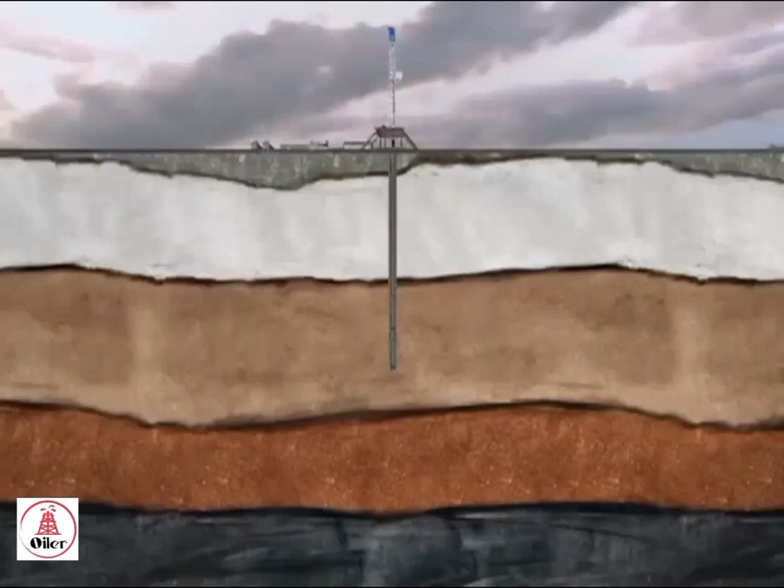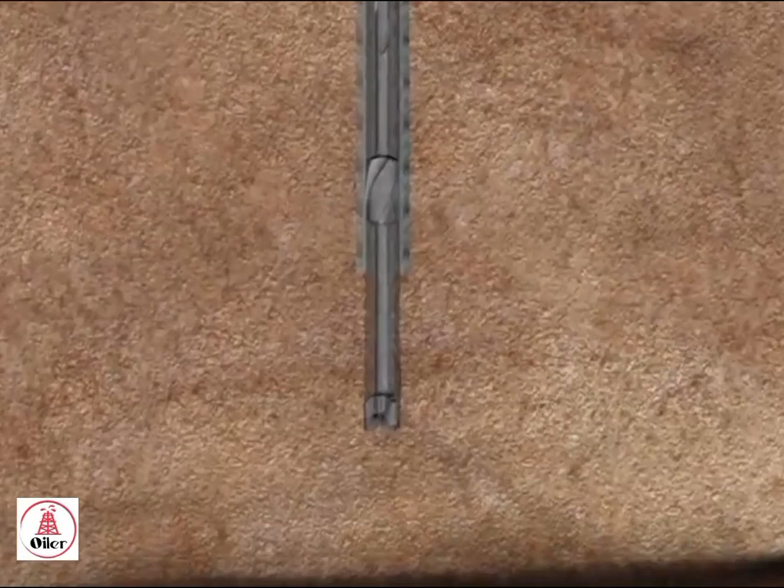Okay, so the conductor pipe is in place, and now we can start to drill for the next casing section, the surface casing. The drill bit slowly cuts through the rock strata, which could be anything from a soft limestone to hard granite, the bit having been chosen accordingly. As the rock is cut, the small cuttings are pumped to the surface in the mud.

The bit continues to drill deeper, pushed by the weight of the BHA and rotated by the top drive or rotary table. After around 2,000 feet, the drilling stops and drilling fluid is pumped through to clean up the hole. The drill string is then withdrawn from the well.

The surface casing is now lowered into the hole, one length at a time. The bottom length has a special shoe, known as a float shoe, fitted to assist with the cementing operation that is to follow.

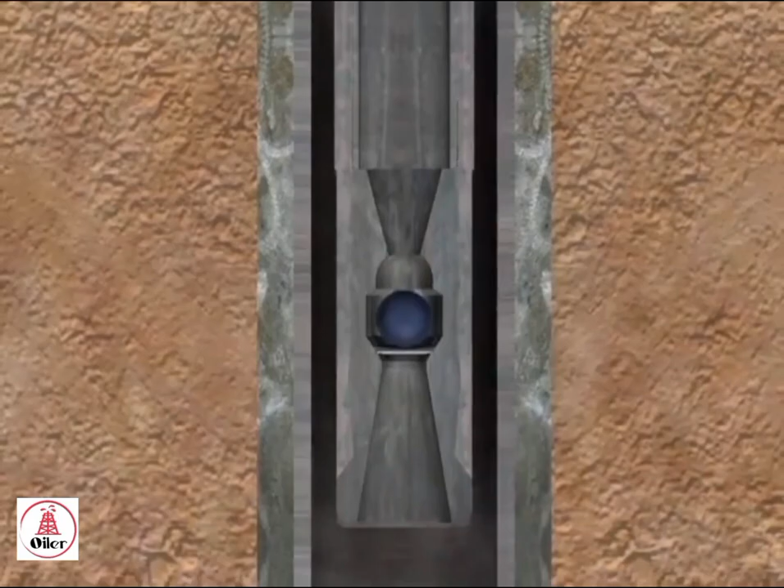Once the casing string is centered in the well, a rubber plug, called the bottom plug, is inserted into the casing string and the cement is pumped in behind it. When the correct volume of cement has been pumped into the casing, a second plug, the top plug, is inserted and then the cement is displaced down the casing until the bottom plug reaches the float shoe.

When it does, pressure builds up until the diaphragm in the plug bursts, allowing the cement to flow through and into the annular space between the casing and the hole. The cement flows up and around the casing, filling the annulus. It flows until the top plug hits the remainder of the bottom plug.

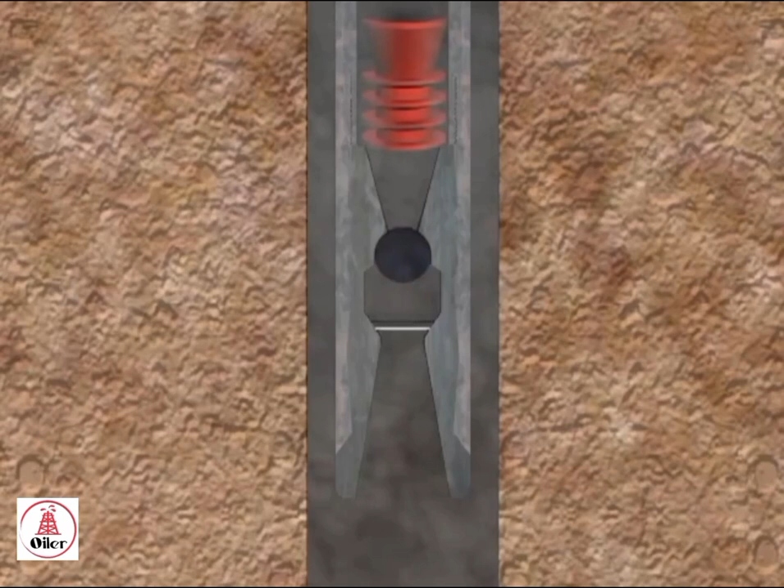As this plug doesn't have a diaphragm, pressure builds and the cement crew at the surface see the pressure rise as an indication to stop the pumps. The check valve in the float shoe prevents flowback of the cement once pumping is stopped. Once the cementing run is finished, the cement must be allowed to harden for anywhere from 12 to 24 hours.

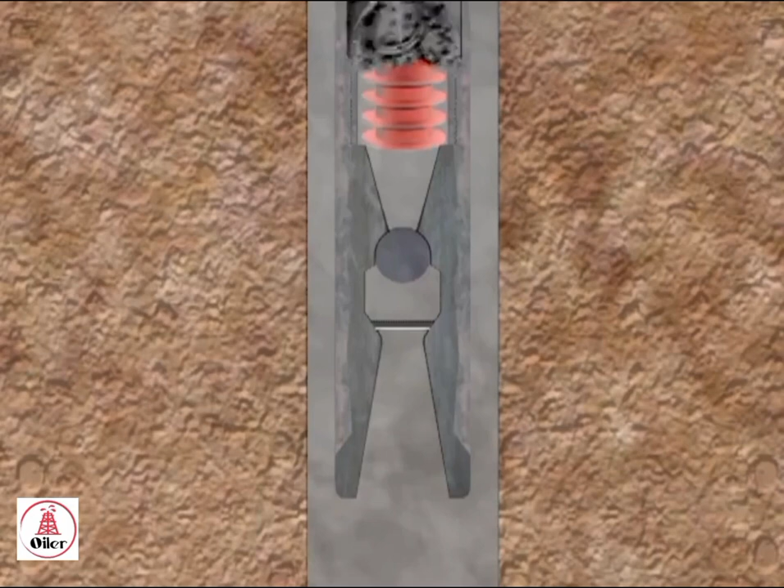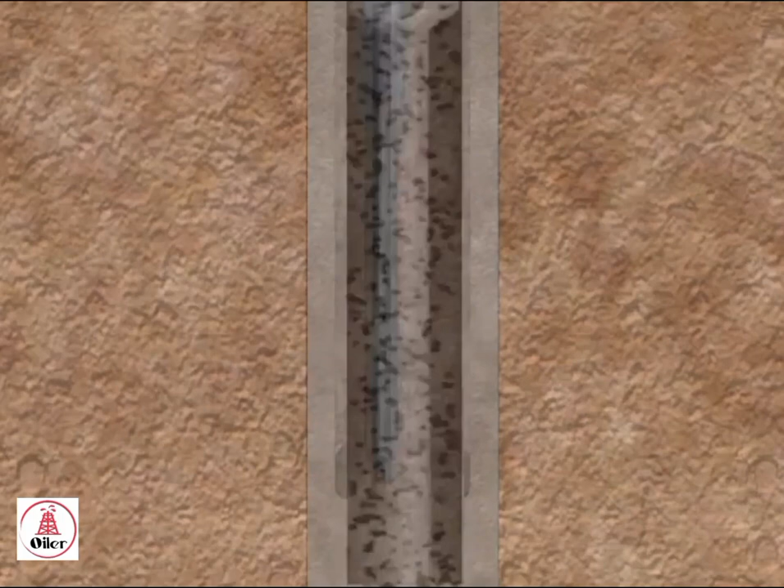Once the cement has set, a smaller drill bit is placed on the drill string and it is lowered into the surface casing until it reaches the plugs. The drilling restarts and the plugs, the cement, and the shoe are drilled through before the drill bit reaches the rock strata. Drilling now continues as before for a few more thousand feet until the setting depth of the next string of casing, the intermediate, is reached, at which point the whole cementing process is repeated.